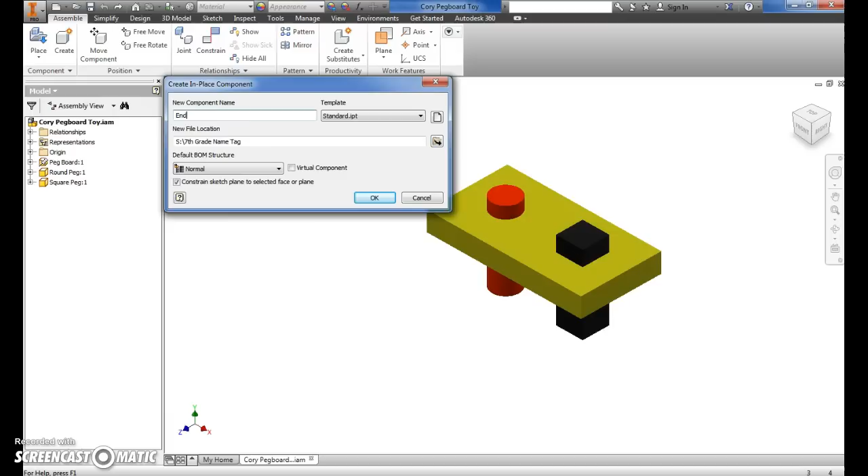The new component name will be End. The new file location should be inside your H drive in the pegboard toy folder that you've created. Click on Save, and then click OK.

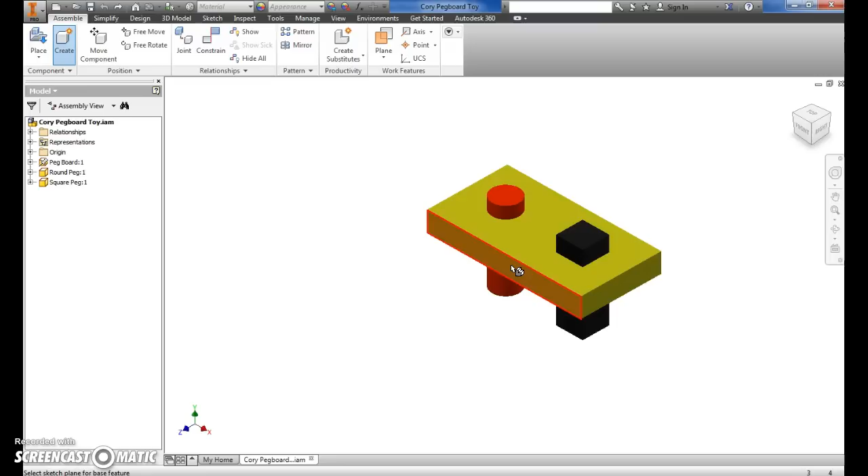Now we're ready to create our 2D sketch. We're going to click on the front of our pegboard. Now we're ready to click on Start 2D Sketch, and we're going to click on the face of our pegboard again. We're not going to select an axis.

Now I'm going to move my pegboard over a little bit and zoom out so it's easier for me to see all of my dimensions. To make it easier to see my pegboard, you'll see that it's really light and it's hard to see. I'm going to click on Project Geometry and then click on the pegboard. This will make it just a little bit easier to see.

Then we're going to select Line, and we're going to start this line on the very right hand corner of our pegboard. Notice the green dot. When you get the green dot, go ahead and click one time. Move your mouse in towards the middle of the pegboard.

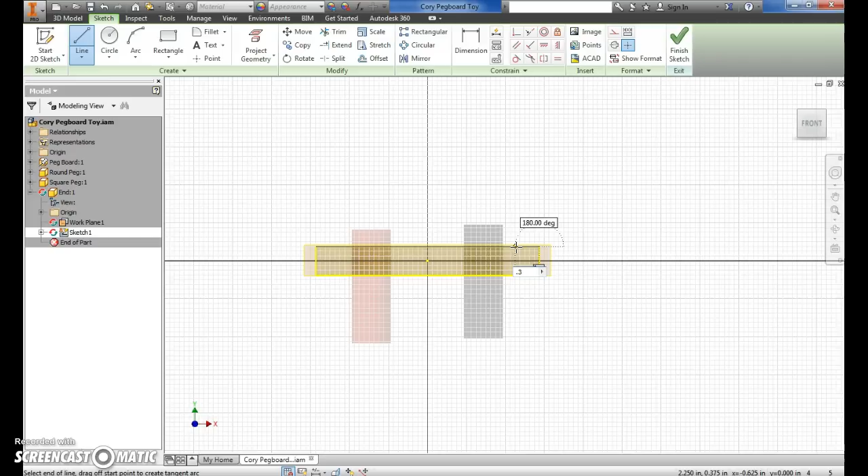This dimension I will type in as 0.375 and then hit enter. Then we're going to go up a total of 2.25 inches. Please make sure that the degree that you see is 90 degrees.

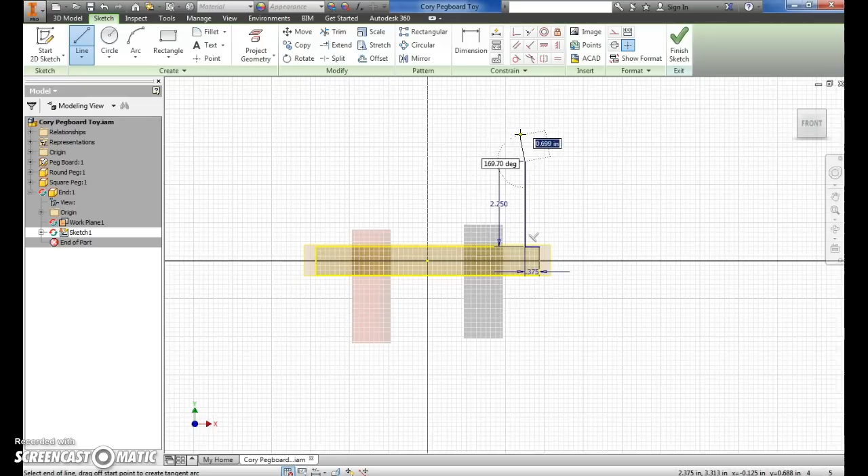Otherwise your lines will not be straight and they will not match up. Hit enter, and then we'll come back to the right. This dimension will be 0.75 and hit enter.

Again, make sure your line's 90 degrees. This dimension will be 5.25 inches. Hit enter. Now it's just finishing off our sketch.

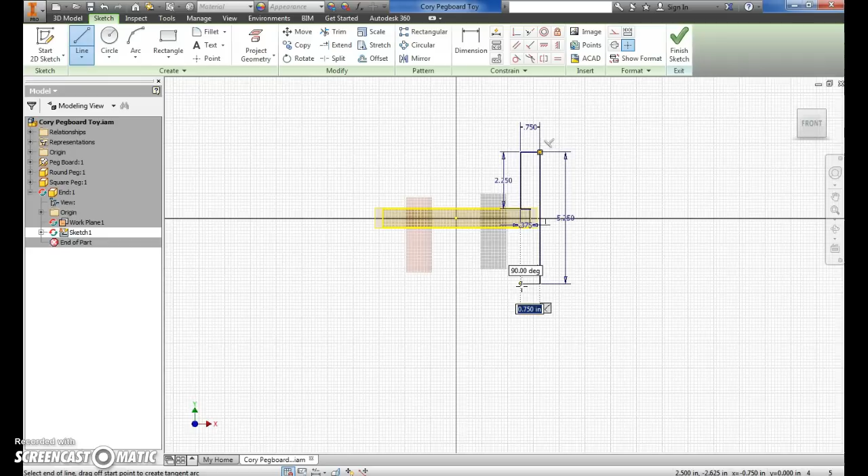I'm going to bring it in, and you'll notice the guidelines. It shows me the lines and where they should be. If you don't want to follow the guidelines to meet up with the other line, you can go ahead and type in the dimensions. This dimension should be 0.75.

Then I'm going to come all the way back up to my pegboard. If you'd like to type in the dimension of 2.250, you may. Then I'm going to come back to the edge of the pegboard, which is 0.375.

And then I'll finish our sketch by closing it out on the pegboard.

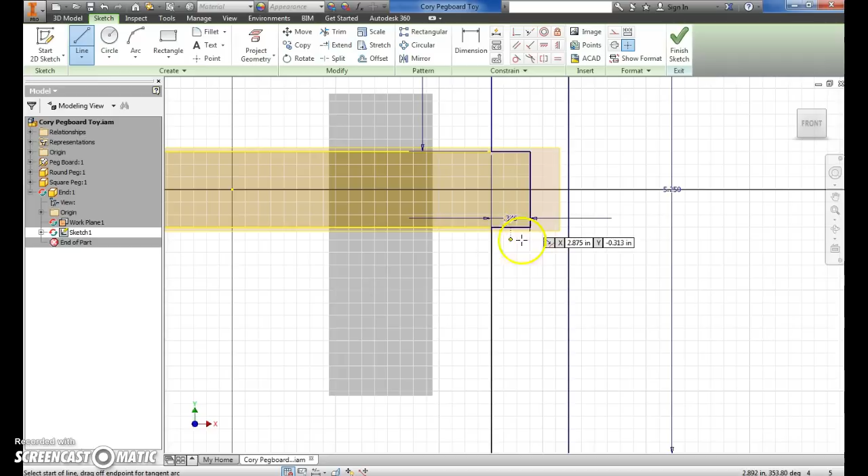Now we need to go over and do the opposite side of our leg. I'll zoom back out, move my pegboard over, and we're going to do the exact same process, only on the opposite side.

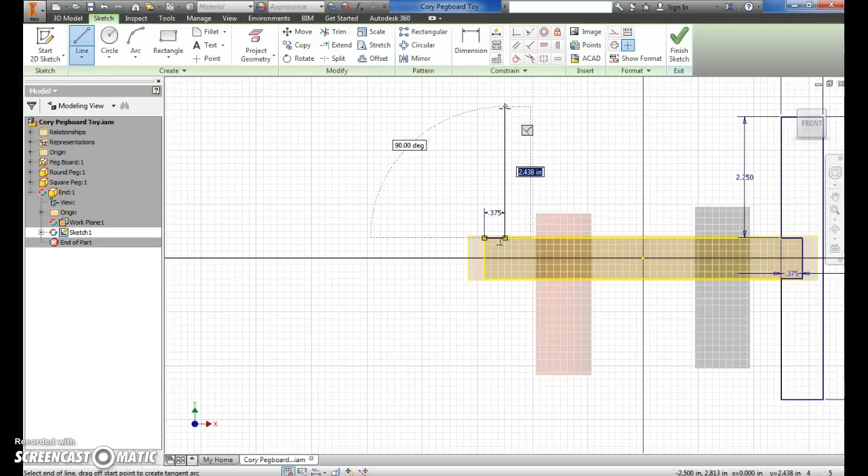So I'll click on Line. I'll start at this corner. I'll come in 0.375, hit enter. I'll go up, keeping a 90-degree angle, and I'll go up 2.25 inches.

Then I'll move out 0.75. Again, make sure you're 90 degrees. The leg should be 5.25 inches.

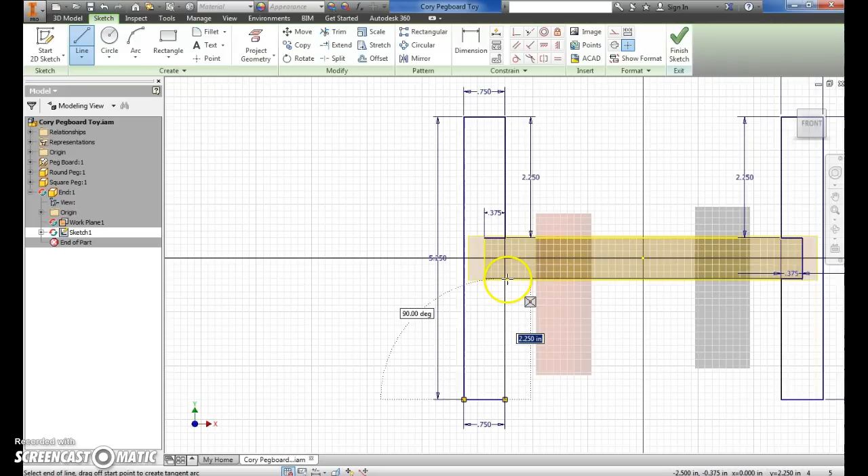Come back in 0.75. Back up to your pegboard, 2.25 inches. Now to the edge of your pegboard, and close off your leg sketch.

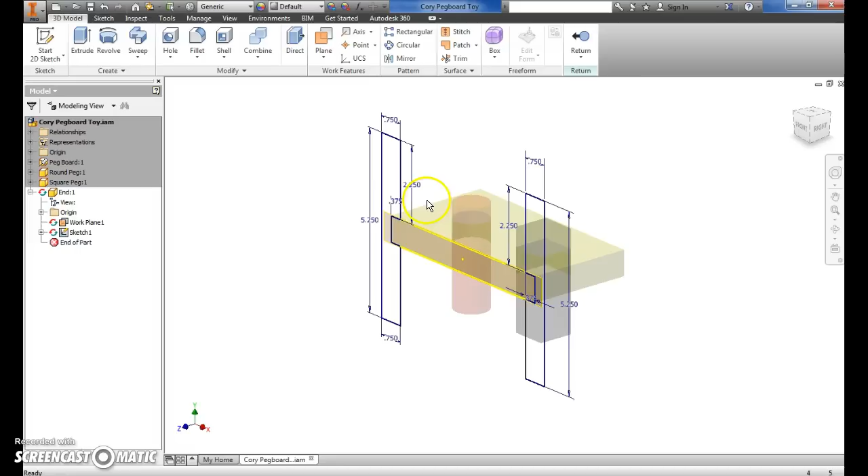Now we're ready to finish our sketch and extrude. I'm going to zoom out slightly. I'll select extrude. We're going to extrude our piece 3 inches to the back.

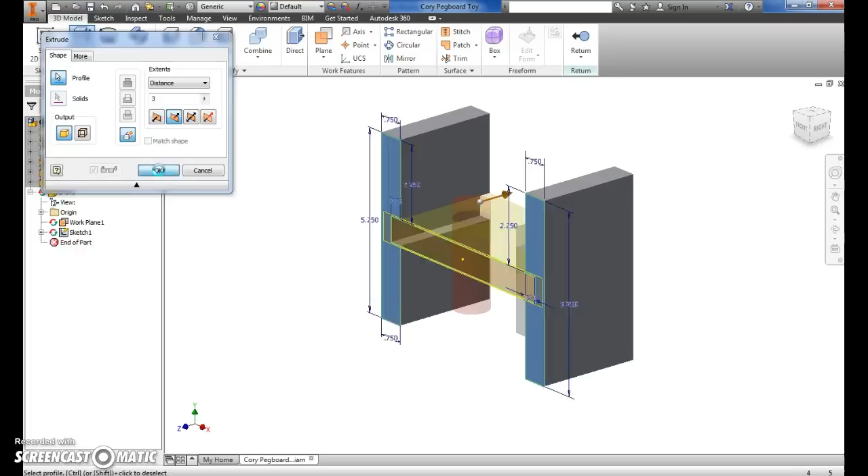And then I'll select both legs. Now our pegboard has legs and we're ready to move on to the next part. Click OK and save your pegboard assembly.